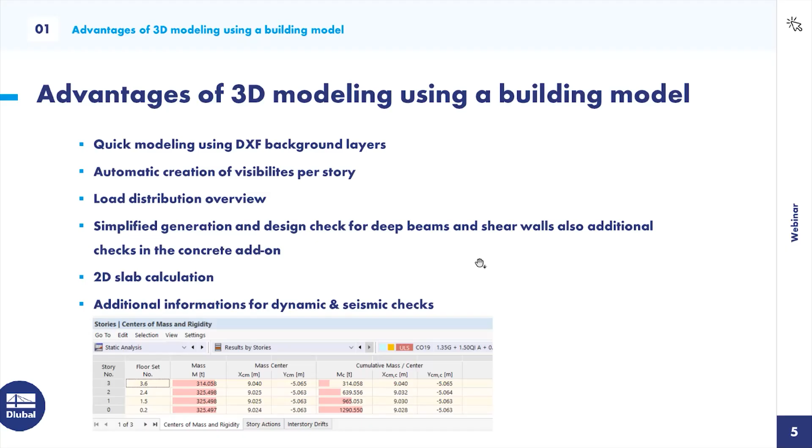Okay, let's switch to the next chapter. Here a little overview about a comparison with positional structural analysis.

The pros of the positional structural analysis are, of course, you can model this very fast and also do the design checks, and you only have two degrees of freedom in this 2D calculation. So you must consider so much less effects and so on. It's very simple, and you can check it very easily.

The cons are when you design a slab or a story, you calculate this, then you must make a load transfer from story to the walls, to the columns, and from there again to the slab. So you must all the time transfer new and new again until you are on the ground floor. And there you can make failure very easily when you forgot some loads.

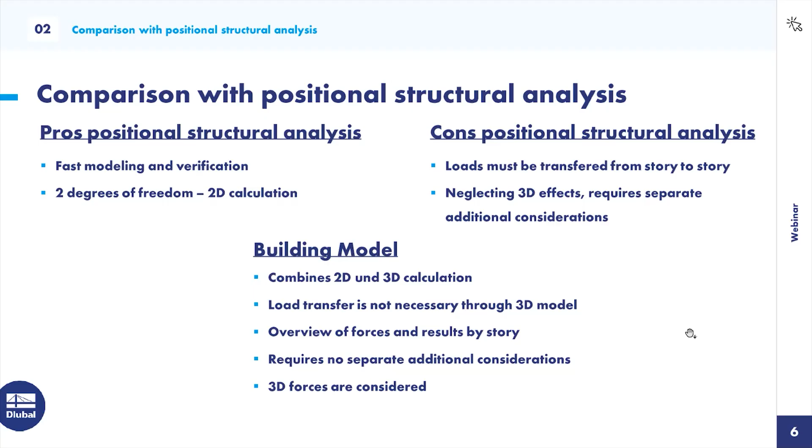Now about the impact of our construction stages analysis. It's more nice to know - I only want to show you the options you have with our add-on. Here you are able to consider construction stages. I will show you, for example, first the walls and the columns.

Then, let's say, after 30 days we make our slab from the ground floor. 30 days later, the first story, and again. So you have, in connection with the time-dependent analysis, the option to also consider the time, and that's very great because I'm of the concrete team.

That's important - what I think about first, the material parameters, for example for the creep and shrinkage. So you see, after 30 days it's a completely different creep coefficient in comparison to 120 or 150 days. So you will have influence only from these material parameters, and we can consider this when we use the construction stages and the time-dependent analysis.

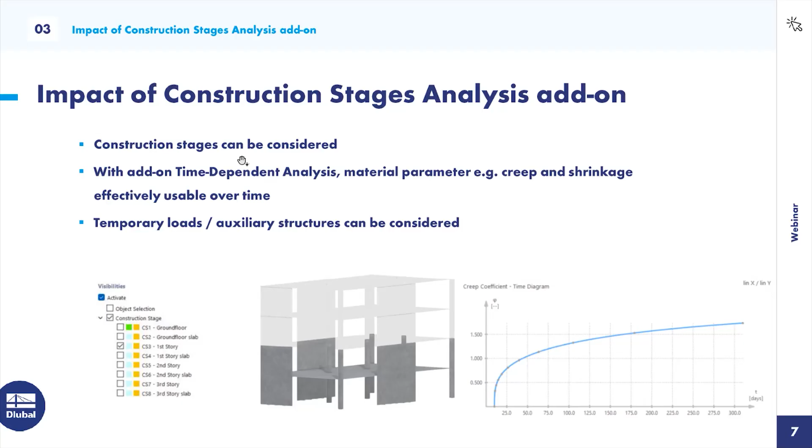Okay, that should be my overview of what I wanted to show you today. Now let's switch to RFEM 6.

Therefore, I will create a new model and call it building model, 3D type of model, of course. Here are the add-ons we need. At the end, I will show you the construction stage analysis and the time-dependent analysis.

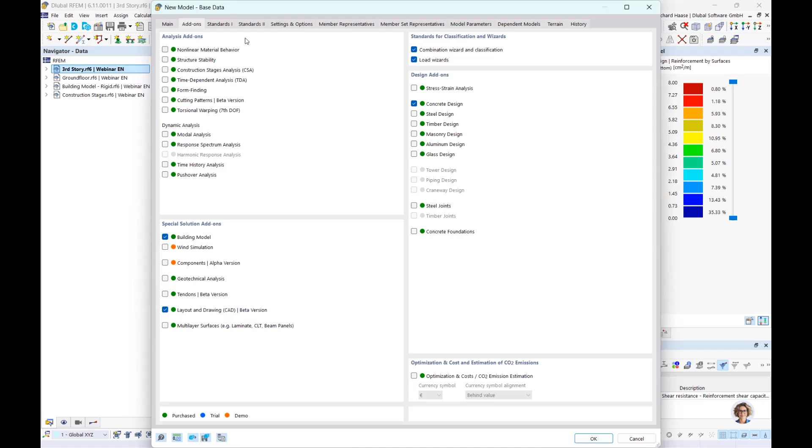But for the first step, I only activate the building model add-on and our concrete design. Here in the standards, I choose today a German example, so let's choose national annexes here.

We also have load wizards for wind and snow, and there's a nice connection with the model parameters. We have our Geo-Zone tool where you can see the forces from seismic, snow, or wind, and there's a direct connection in RFEM6 when you click this button, which opens our Geo-Zone tool in the background showing information about snow, wind, and seismic.

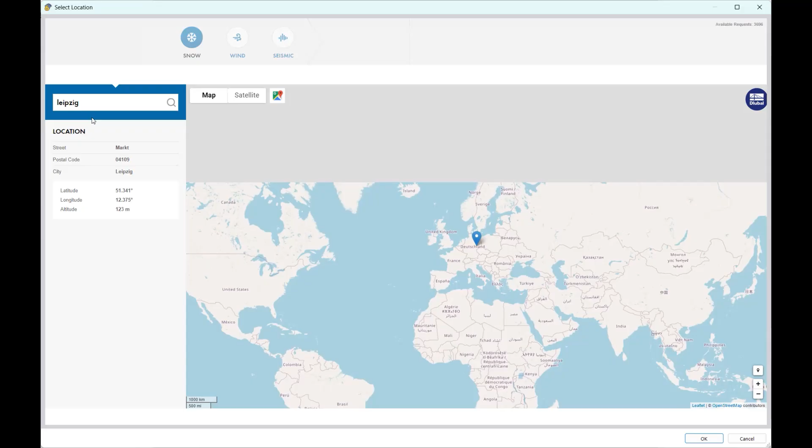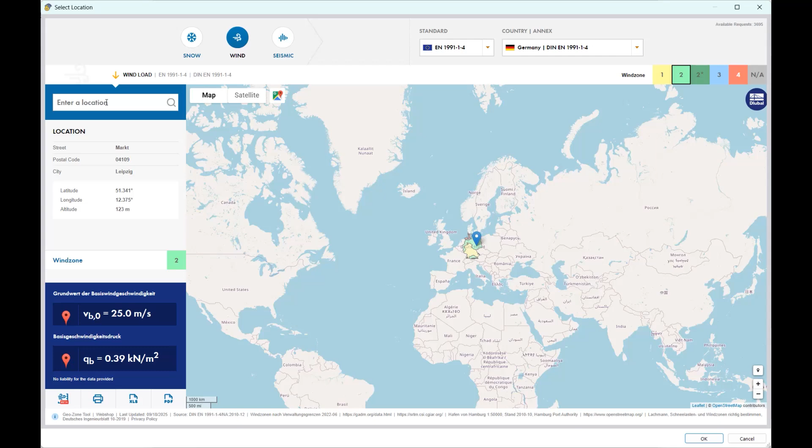Let's take our Dlubal office in Leipzig and say OK. Here we see the characteristic values of the snow and wind loads. When we click OK, RFEM6 imports this information from the Geo-Zone tool. Now RFEM has the information, and when we go to the load wizards later, RFEM already has the data, so you don't need to choose the category, wind zones, and so on. I'll show you that later.

Okay, then let's go to the materials. I have chosen concrete C30 and reinforced steel B500.

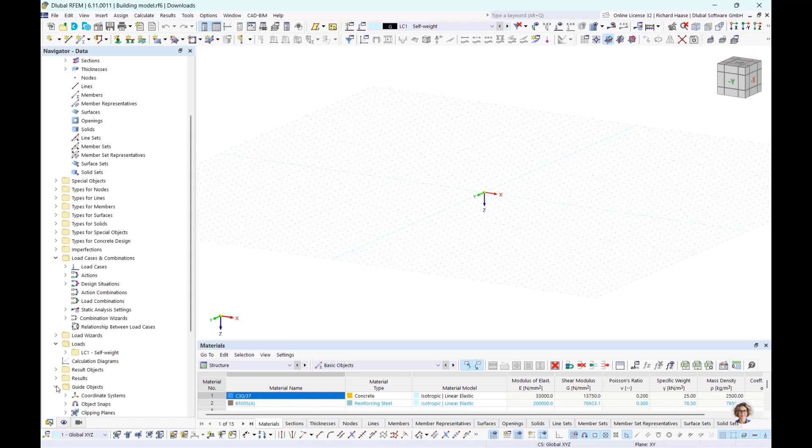Now I want to show you the quick modeling. For this, we need our background layer under the guide objects. Okay, here we have our background layer.

First, let's switch to the building model, where we can create our building stories. Let's say we want a 3-meter height and 3 stories above the ground floor, and choose our floor type as rigid.

When we choose semi-rigid or rigid floor diaphragms, we have the option to select the supporting type for all nodal and line supports, similar to what you'd design in a 2D calculation. Let's say we want hinge-to-hinge for the upper floors, and in the ground floor we have a rigid hinge on both sides.

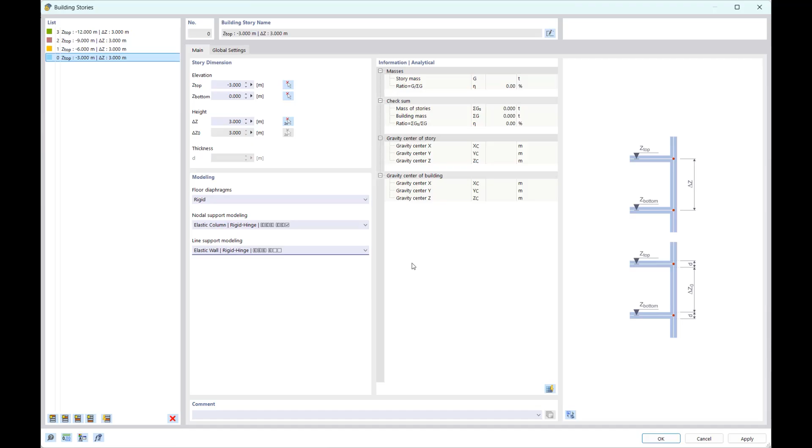Okay, then we have created our stories. Now let's begin with the modeling.

First, maybe we delete this and say okay, I need a new section. We see here we have circular columns, so I choose this column. Let's say 200 millimeters is the default setting.

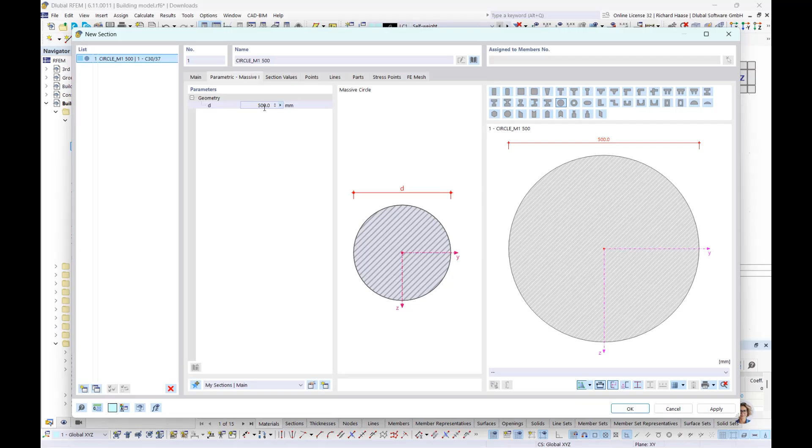Now we want to measure the information directly from the DXF background layer, so from here to here, and it switches to 500 millimeter diameter. Okay, then we also have our walls.

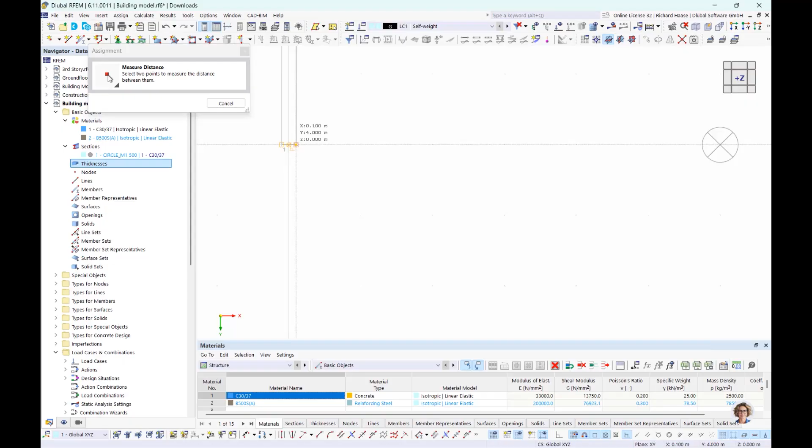For the walls, we do the same: a new thickness, and what I only changed is to show that it works, 300 millimeters. Let's make that the default setting, and measure the information from the DXF file - we get 200 millimeters for our walls, and we need a new thickness. For the slabs, it's 24 centimeters. Of course, you can directly read this information from the 2D background layer, so I take this measurement and it's fine.

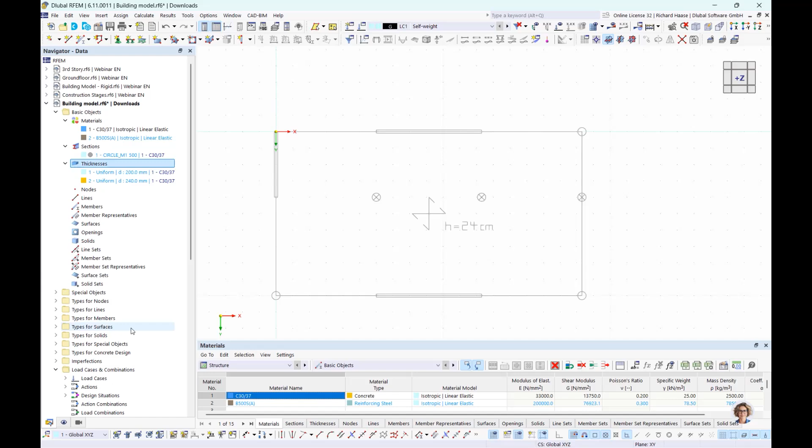Okay, then we have created our sections and thicknesses, and now I want to change the rendering for the input. For that, you go to Model, Solid Model, Surfaces, and here we have the option 'filled inclusive thickness'. This is very good for control - you'll see what I mean in a few seconds, but let's first start with the columns.

This button is really specific to the building model add-on, and it gives you the option to model via the bird's eye view. So let's start with our columns.

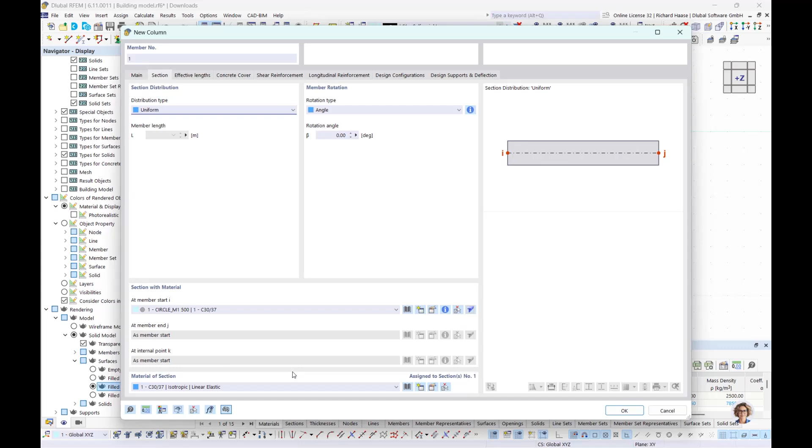We choose our measured section, and here we can select the building stories - let's say we have this column in all building stories. Apply - oh, I made a mistake, sorry, I clicked too fast. Okay, so we have these columns, and when you go here, you see directly this big bubble.

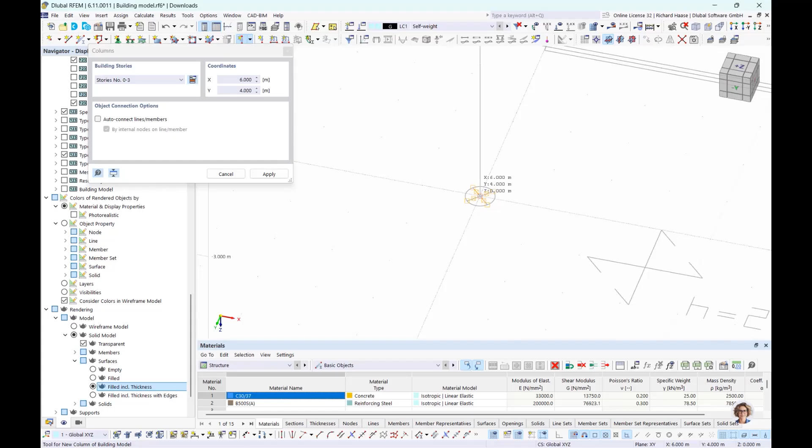It's the sum of the masses per story. When we click here for another point for the columns, you see it's growing and moving more toward the middle. Let's do this for the others too, and our columns are ready.

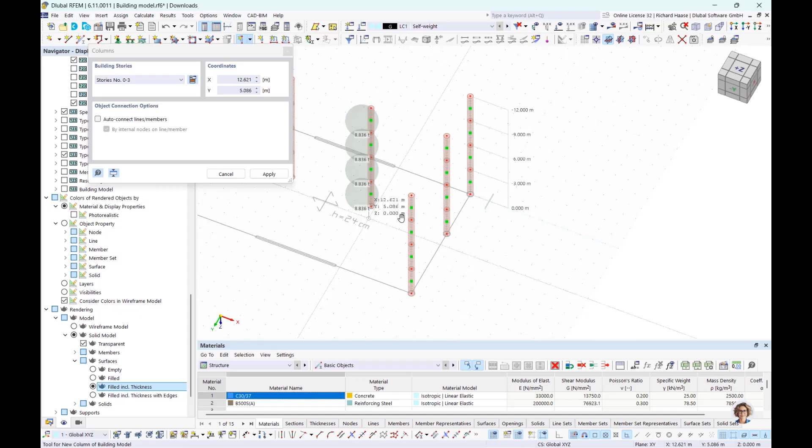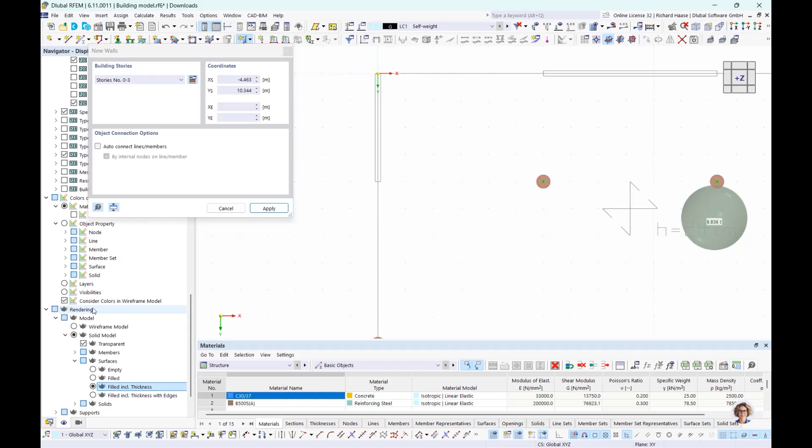Now the same process for our walls, our 20 centimeter wall. Maybe we switch back to the bird's eye view. Now you see here our rendering option - there you have a direct control option to check if the thickness fits the background layer, and you see, okay, it fits.

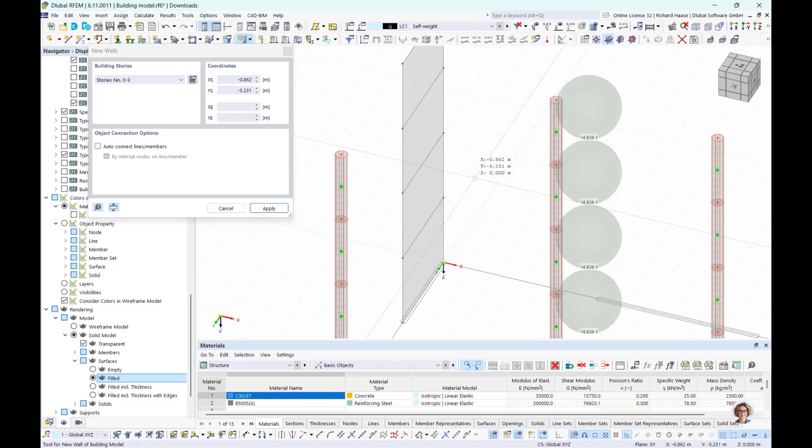The default setting is only filled, giving you a 2D visualization, but here we have the real thickness, and I prefer this for controlling. Let's continue with the other walls, and our last walls here.

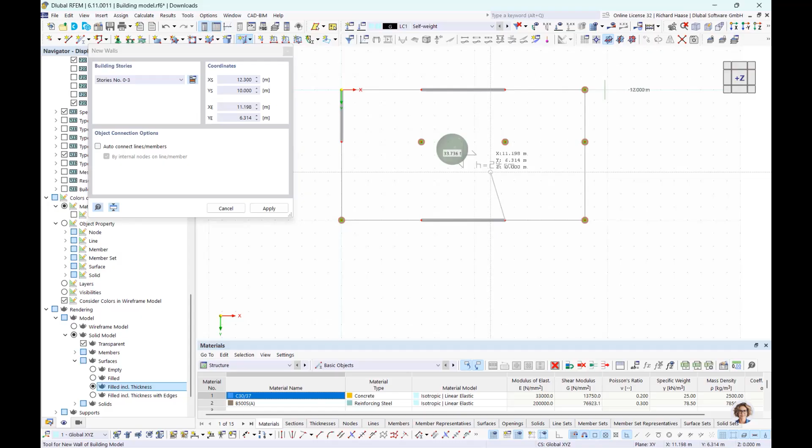Okay, one thing is missing - the slabs. Let's choose the rectangular floor here. For this, we need the other thickness, 24 centimeters, and of course all stories are activated.

Good, now we see here these red lines. It's the special thing of our slab type rigid, because for this rigid slabs, there is a moment.

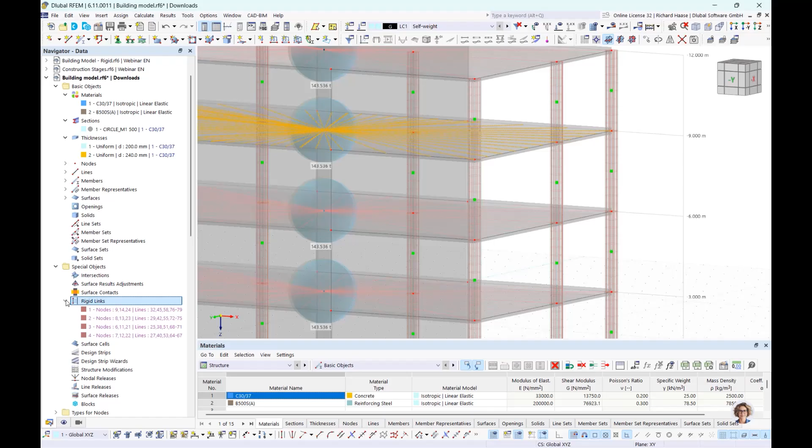We have here also special objects, rigid links, and this rigid links connected the edges of every slab to the center of mass per story.

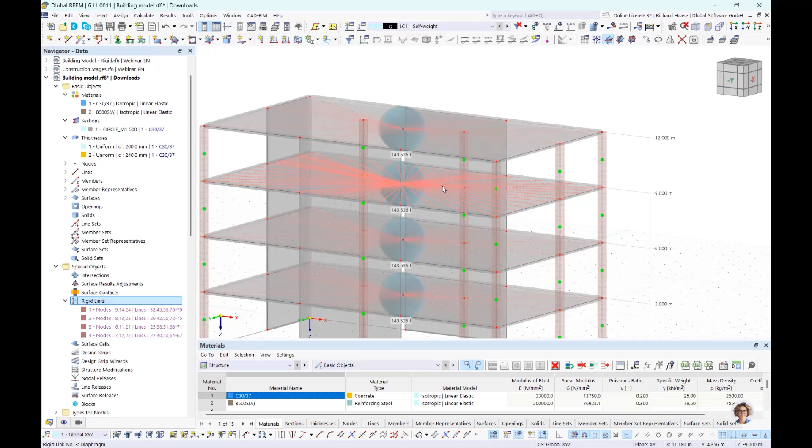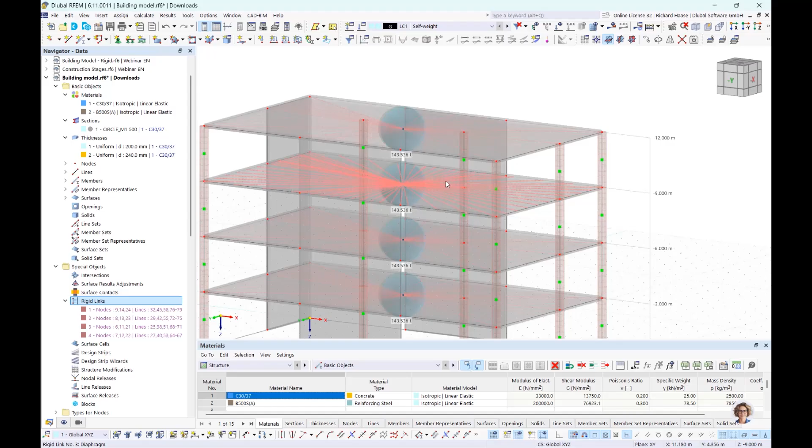So this is a good point for dynamic analysis, because it simplifies the masses to one point, and it's then more clear for dynamic and seismic analysis. This also reduces the calculation time and the eigenvalues. This is a really nice feature for dynamic analysis.

Okay, so we also can deactivate it here. One moment, it's the special objects. Okay.

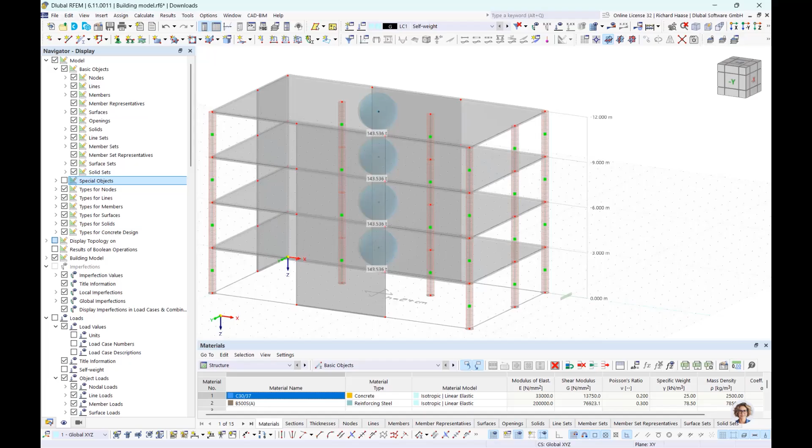And now let's continue with the supports. Let's say we have here our fixed nodal supports. And also the line supports, let's say it's also rigid. Choose here, here, and here.

Okay, then let's go to the loads. Therefore, we must create some load cases. Let's say here self weight, or dead loads, and here we need some live loads. The snow and wind load cases I will show you through the load wizards.

So let's say firstly okay here, and go now to the load cases and create some surface loads. Really simplified, but it should fit. Okay, let's say we have here 2 kilonewton per square meter, and we can say apply and next.

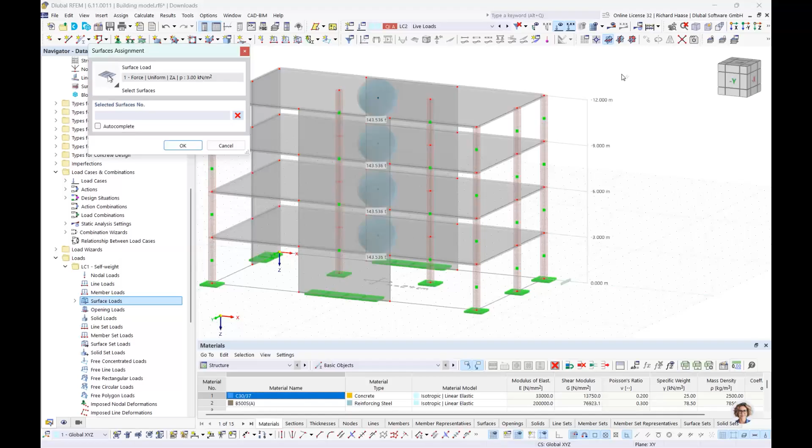So, switch to our live load case, and here we want to have 3 kilonewton per square meter. Okay, and let's finish this. So we also have the option to control this very fast, but it looks good.

So then let's switch to the load wizards. We have here the option to activate such load wizard, relatively new, let's say we have also load wizards for the moving loads.

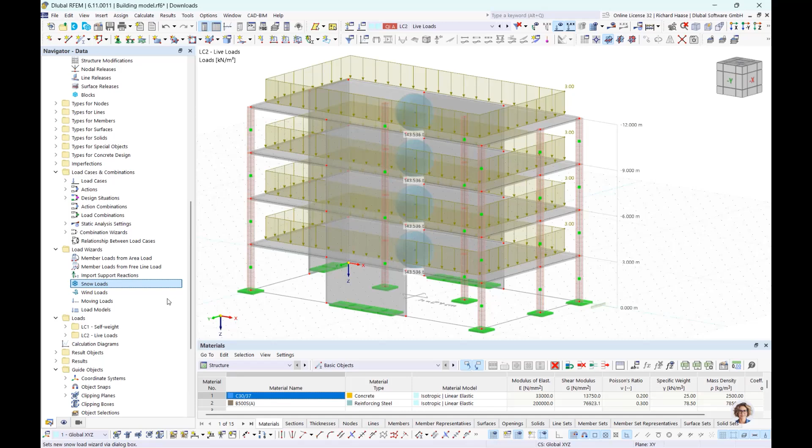Okay, but let's go to the snow loads first. We want to create a new load wizard for snow. Must here first pick the roof corner nodes, and let's see, here, and here, and yeah, we have a flat roof type.

Go now to the parameters, and now we see what we do in the beginning. The definition type is changed to map and parameters, to this German location, and you see here it's automatic, which load zone with height, which height, and the characteristic snow loads and other coefficients. So this is simplified, and it's easy to switch here.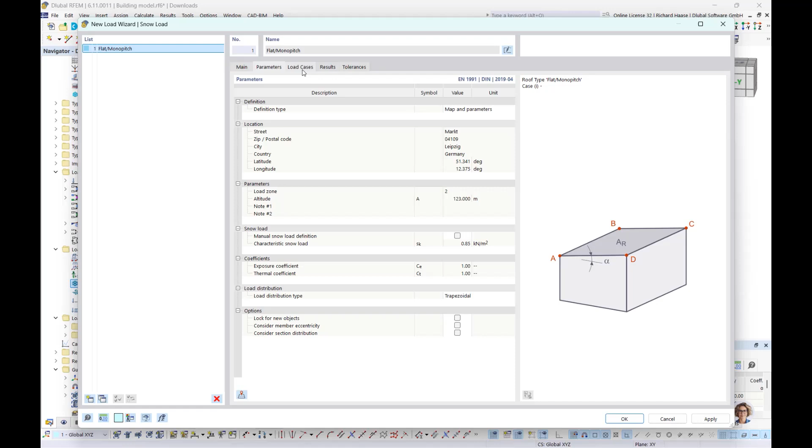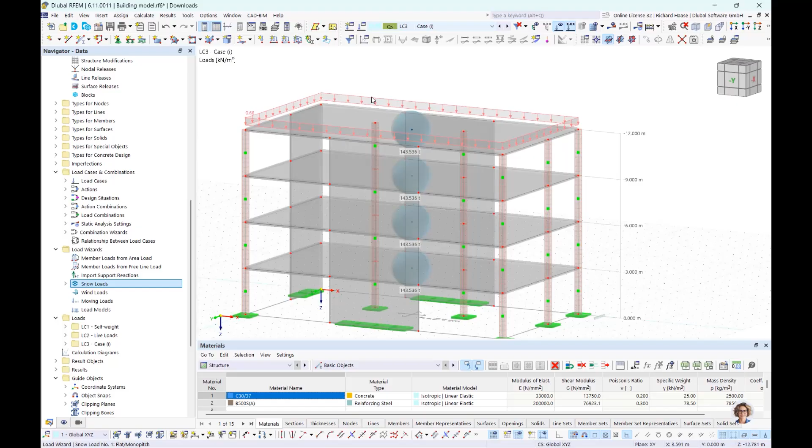Okay, then to the load cases. So you see here, I would create a snow case here for you, and you only must click this button, generate load case, and say okay. Very fast, we have now our load case here with our snow loads, and the same works for the wind loads.

Here we must, okay, that's the base corner. And here. Okay, the same for the roof corners, for the wind.

Okay, so then you see on this picture, we have here our 4 wind directions, and let's say we limited this to wall 1 and 4. And okay, the parameters here is the same. You see our location, the terrain category, altitudes and heights, and load zone.

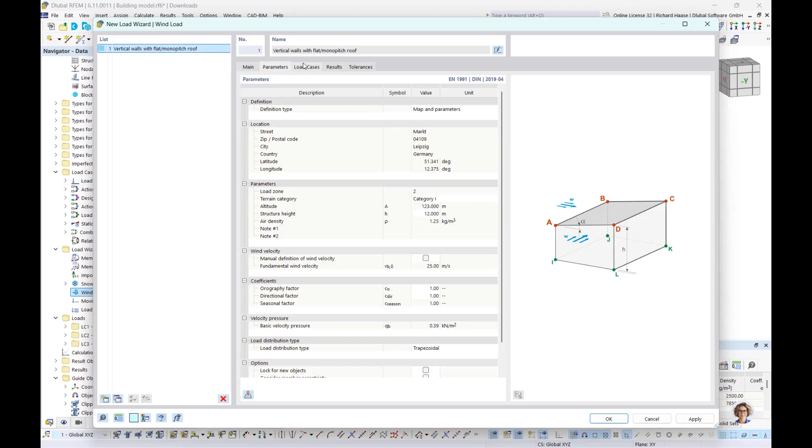It's automatically transferred from our map. And yeah, so we have here again this option to generate automatically our load cases. And we have here 2 load cases per direction, and say okay, and we can prove it, of course.

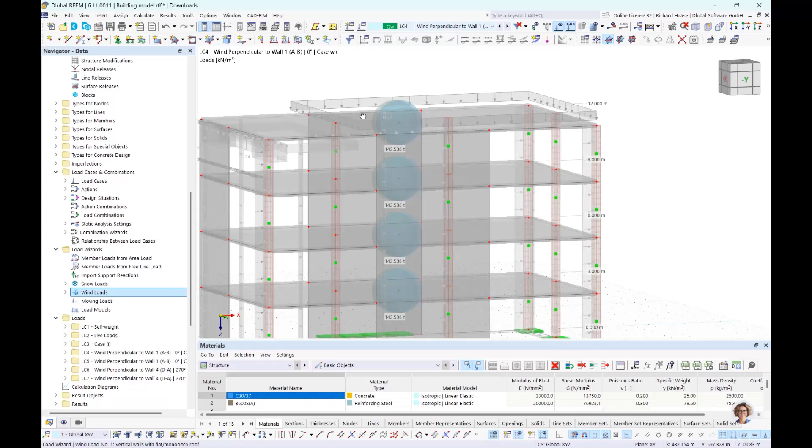So we see here our wind loads, here special this load area for the slab, and the same works here for the other wind case.

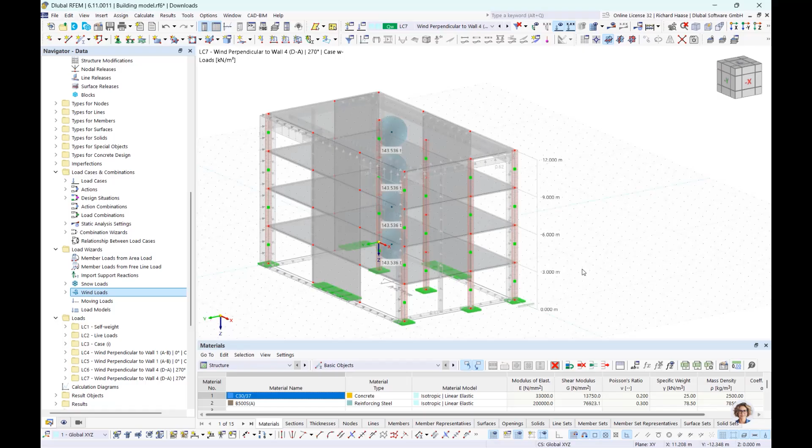Okay, so our loads are finished, and I don't want to waste time with calculation, and would switch now to a calculated model, our building model.

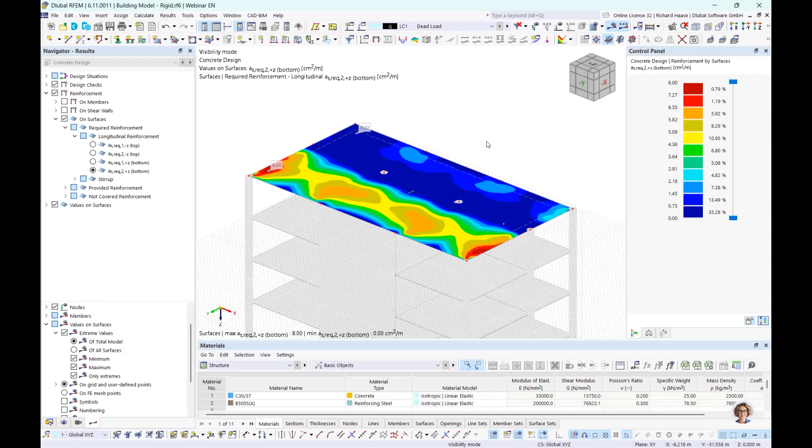Here we have results, and let's go to the dead loads and switch to the static analysis. So, oh, I don't have calculated. Okay.

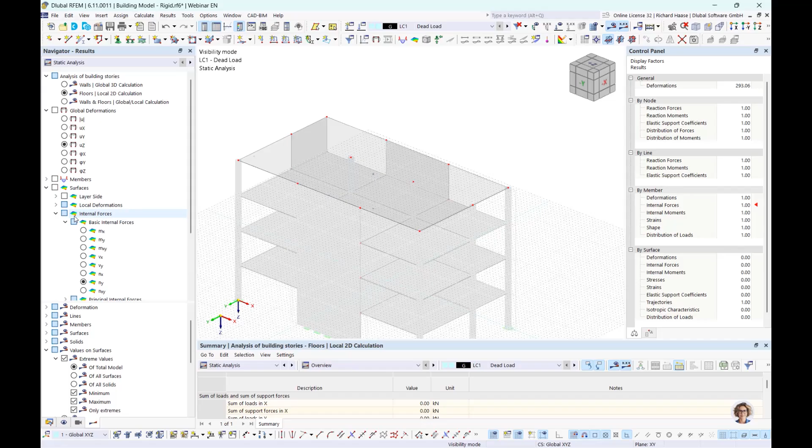Yeah, and here we see the first thing which is activated when you have chosen the rigid or the semi-rigid floor type, that it is calculated 3 times, and that's because we have now here an additional option in the static analysis of building stories. So you can have a look only on the floors, on slabs, and I want to show the internal forces, the moments.

Switch back to all, and now you see here really only the results per story per slab. When we switch to the 3D walls calculation, we have additional walls, and because these walls are connected via the slabs, internal forces can also be in the slabs. This last option, walls and floors, is a sum of these two.

And here we have our combined results. But what I want to show you before is our load distribution for the case of the dead load. Oh, and I forgot here our visibilities, which are automatically generated.

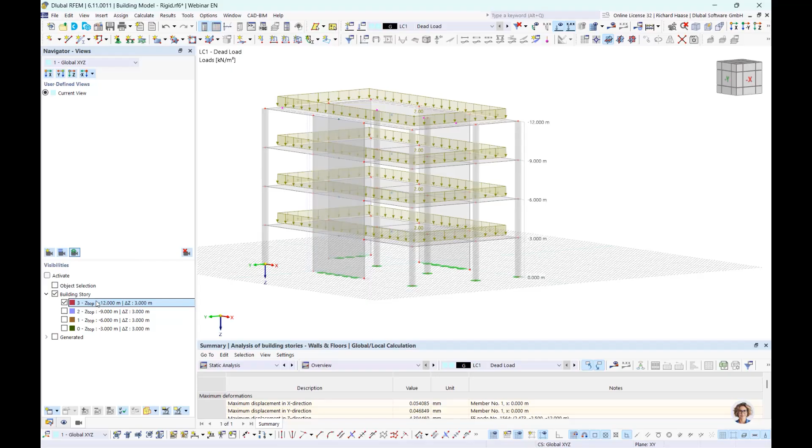Now we have the option, or in the normal case you must define this by yourself, but the building model add-on creates it automatically per story, so you can easily switch and have every story a fast generated view for that.

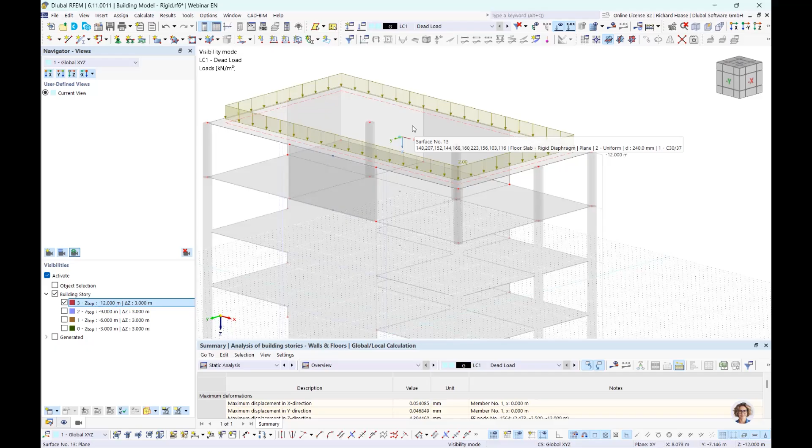Let's go to the third floor, and here we have our surface load, and now we have the option to see how the load distribution works. We right click on the surface and use this button, loads from load distribution surface, and now you see how the surface load is distributed to the walls and the columns.

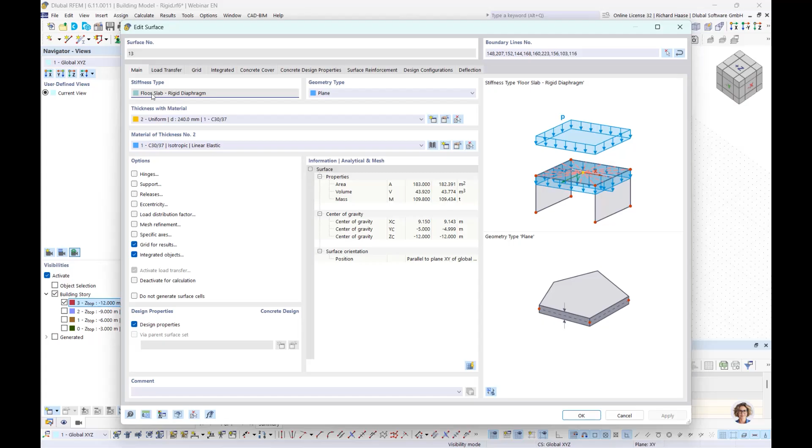When you double click on the slab, you see here our stiffness type, floor slab rigid, and we also have a load transfer menu. Default setting is the FEA type, but you can also say it should only distribute in the local axis X or Y stripes, or X and Y stripes, if you want to do it that way.

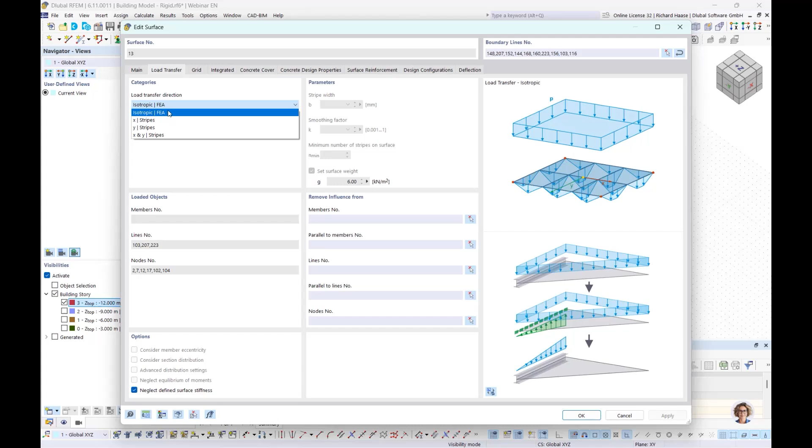Okay, but let's switch back. Another thing I mentioned in my presentation before is that in the building model we have the building stories, and now we also have the option to define shear walls and deep beams. For the shear walls, I do it here before. So when we click here, we have this one wall, and it is easy to define.

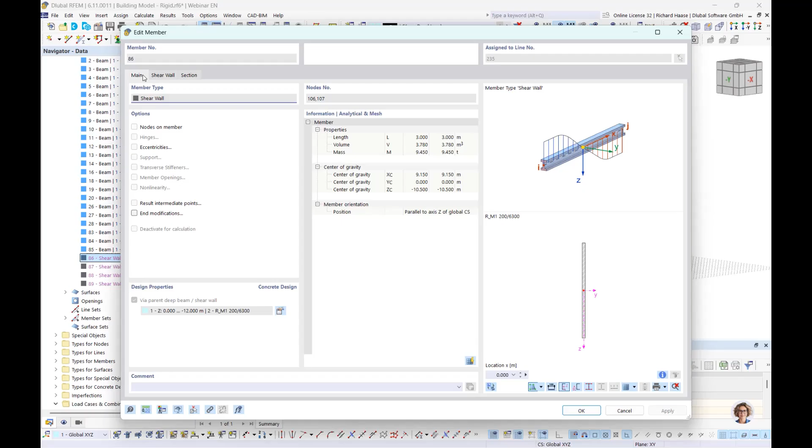You only must select surfaces or surface cells, or even a member is also possible. In the background we can see our columns, and this purple color shows the shear walls that are generated in the background. You can see it's a result beam, which integrates automatically the surfaces, surface cells, or members chosen before.

And finally here our member sets. So you see, you can also do this manually, but the building model add-on simplifies the steps.

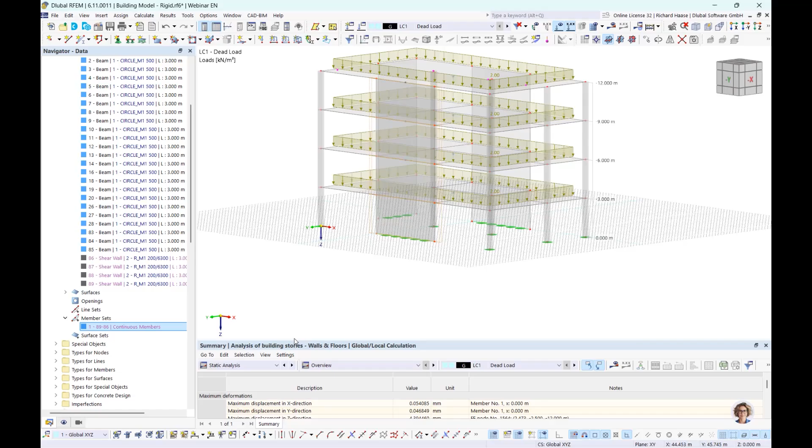Another good point is when we switch to the static analysis, we have a new chapter, results by stories, and can really see which results come from which story. Here story actions, horizontal forces for example, or interstory drift or deformation.

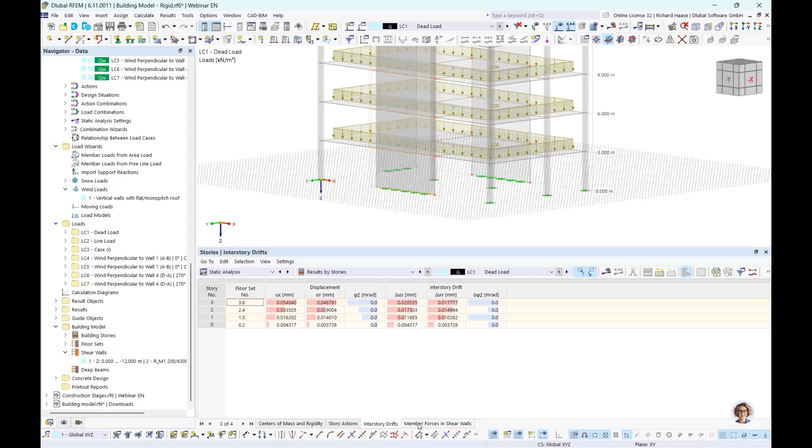And because we defined our shear wall here, we also have a new chapter, member forces in shear walls, where you see the axial forces, shear forces, and moments separated for every story. That's a feature which only the building model add-on can provide. Of course, you could create it via a result beam, but these results by stories you wouldn't have without the building model add-on.

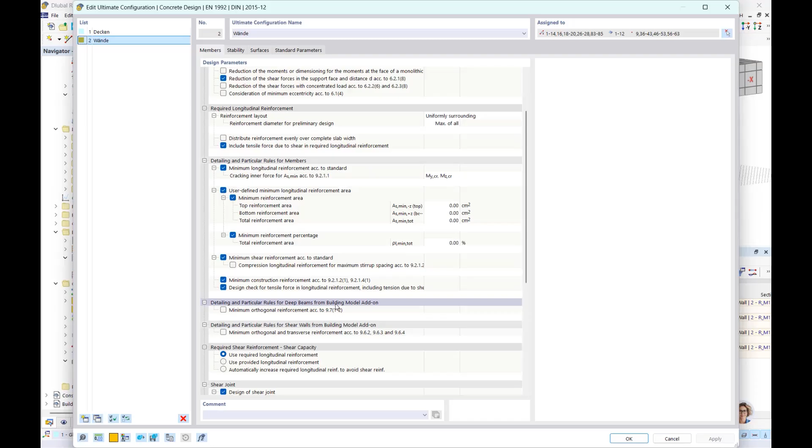Okay, then let's switch also to the concrete design configurations. Because these walls and deep beam shear walls and deep beams are result beams, under the concrete configurations we have a chapter for members with special additional checks, which are only possible when you use the building model add-on.

And also, for a better overview in the concrete design, when we check here, we have additional design ratios or reinforcement calculations for shear walls and deep beams. Without the building model, all these ratios would be found on the members, so now you have an extra chapter for that. It simplifies the work and gives a better overview of the results.

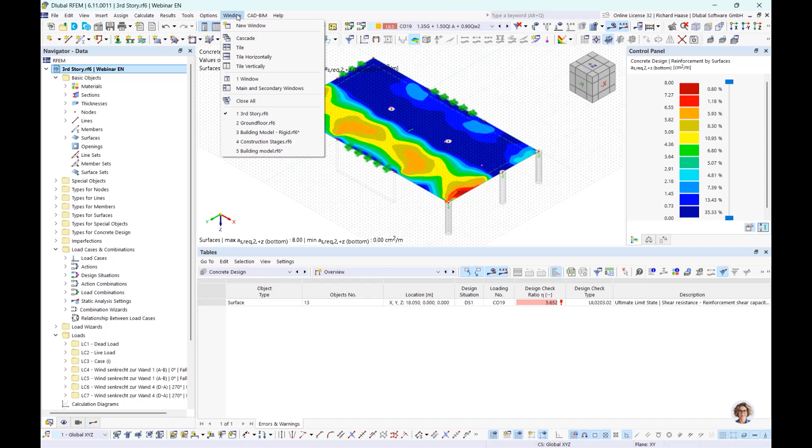Okay, then let's compare this to the traditional way of analyzing slabs. We want to have a look at the third story, and I will show you that we get really the exact same results. Therefore I want to create the windows next to each other, and when that's not... okay, now we have selected both. I want to show you again the window.

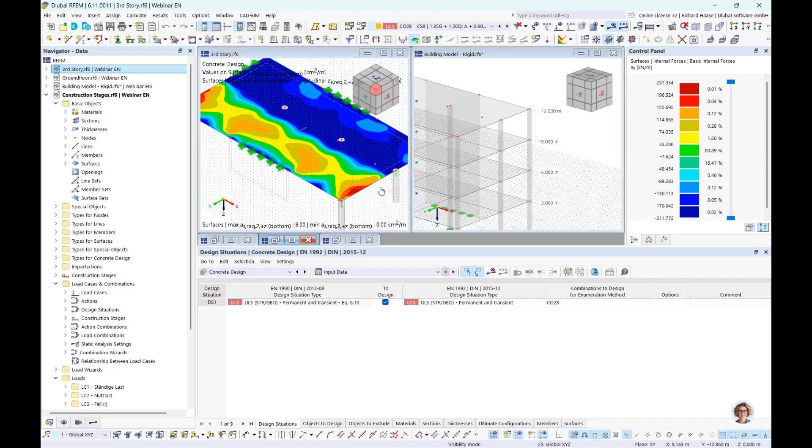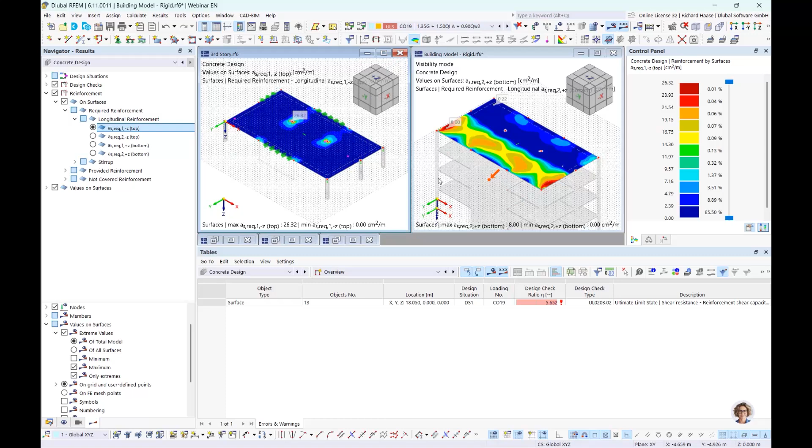Go here, select only the third floor. Okay, now you see the 2D model, choosing also here type of model, 2D plate, and let's compare here the required reinforcement. With our building model, you see we have exactly the same results.

Let's do it again, and the last one. So you see it's with the building model, it's possible to have a traditional structure analysis calculation of 2D, but integrated in a 3D model. And yeah, you get the same results here. That was what I want to show you.

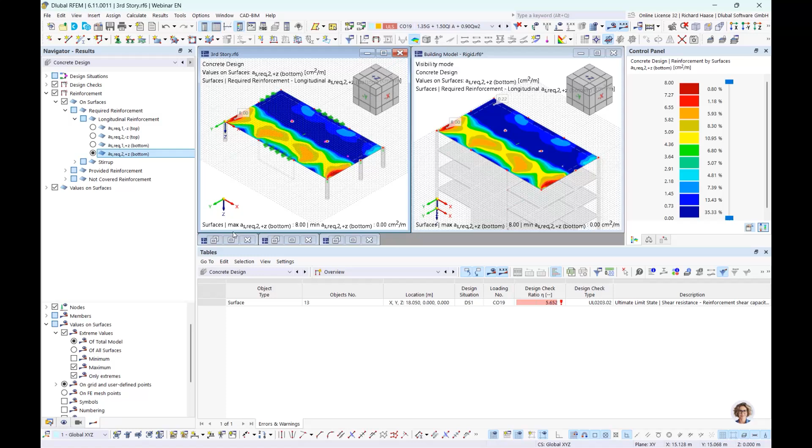So okay, maybe we go, I hope this was the right model, to the ground floor. Because I also want to show you the option with the load transfer, and show you that it works the same way with the 3D model.

So I have created every story, an extra model for every story. And here my last step was to load transfer from the first story the forces to my ground floor slab. And here you see this connected model. The thing is, it works: you must create in our Dlubal Center connection that all models are in the same folder, and then you have the option to connect these models.

And when we switch to the object chapter, you're also free to use it manually. There you can say, okay, for example, I only want to transfer from only single nodal supports or single line supports to this and this node or line. Or the faster way would be free loads, created from the support reactions, as free loads on our actual model.

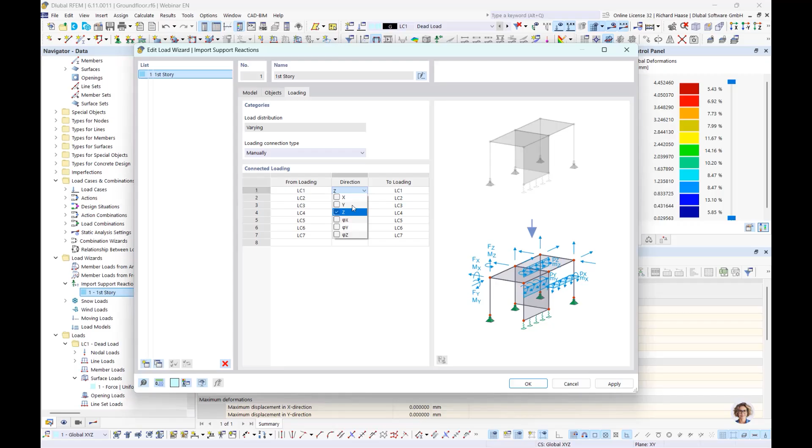Then for the loading, you also have the option to say, okay, I want to choose it manually. So you can transfer from load cases or also from load combinations to our actual load case or load combination, and can choose here also the type of forces which should be transferred. So I only choose here the Z direction.

And yeah, only for comparison of the dead load, you see here again in this purple color the loads which come from the first floor slab, and can control it here also the forces, and yeah, these models are also connected.

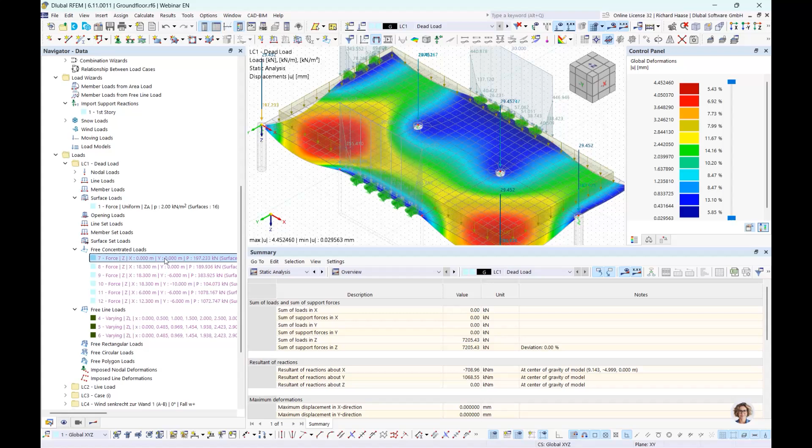For example, when I change something in the second floor, these load transfers are connected with each other because they are in this Dlubal Center folders, and then there's an automatic recognition that this change also results elsewhere. And if you don't want this, you can also say, okay, that's finally good enough - you can separate the connection, and then it's fixed.

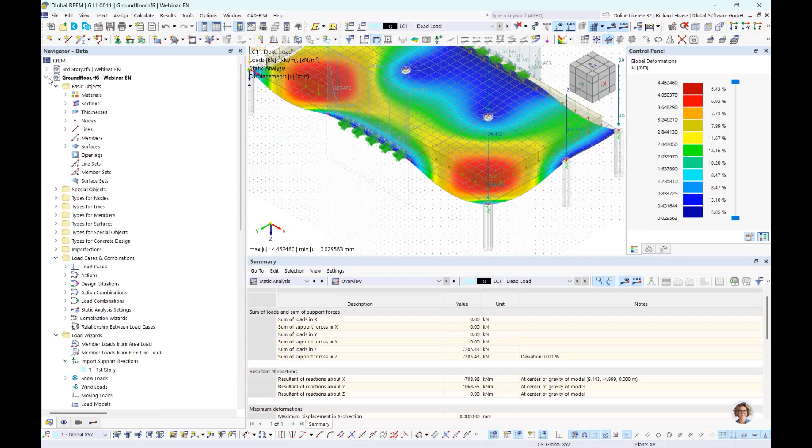But the thing I want to show you is the sum of loads, and we have here our 7.2 meganewton, and when we switch back to the building model, so 7.2, dead load result by stories. We have also here 720 in ton.

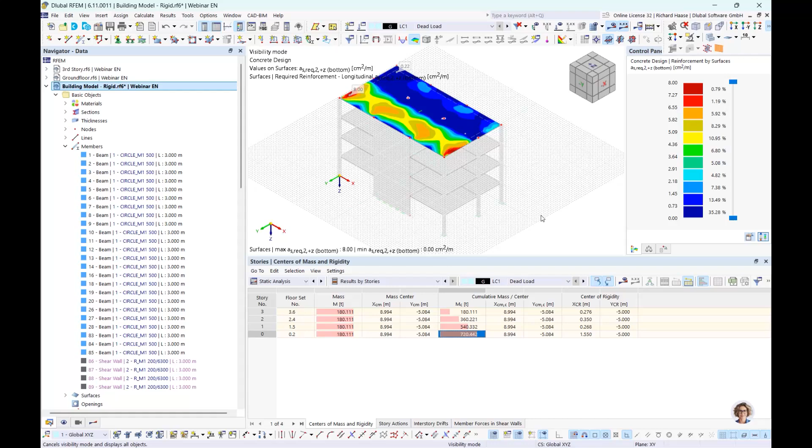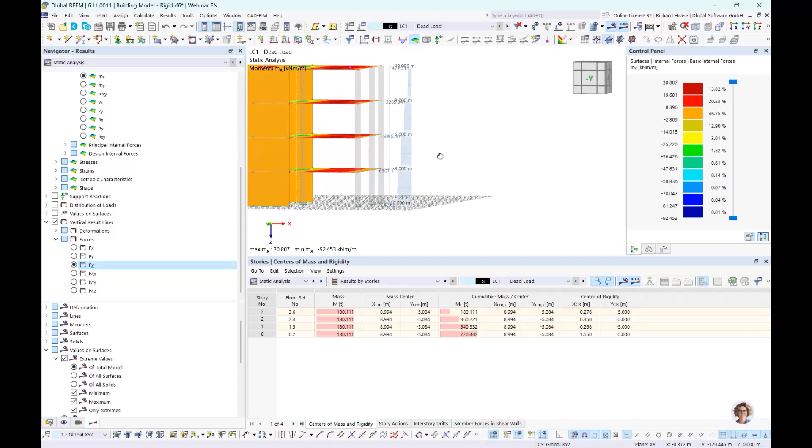But we also can do this when we cancel this over the static analysis. Here we have vertical result lines, also a feature only from the building model. You can say forces and FZ, and you see also here the forces per story, and finally also here our 7.2 meganewton. So the masses are identical when I choose it in 2D and 3D.

Okay, then let's maybe deactivate it again to the story actions. So I mentioned also that it has pros when you use dynamic analysis or seismic analysis. So you have here, okay, for dead load it's a little small, but...

The forces in global X and Y, and these forces you can compare, for example, for the seismic forces, and can think about it if the seismic forces are governing. And also with the interstory drifts you can do serviceability checks and say, okay, this deformation per story is too high, or it's okay.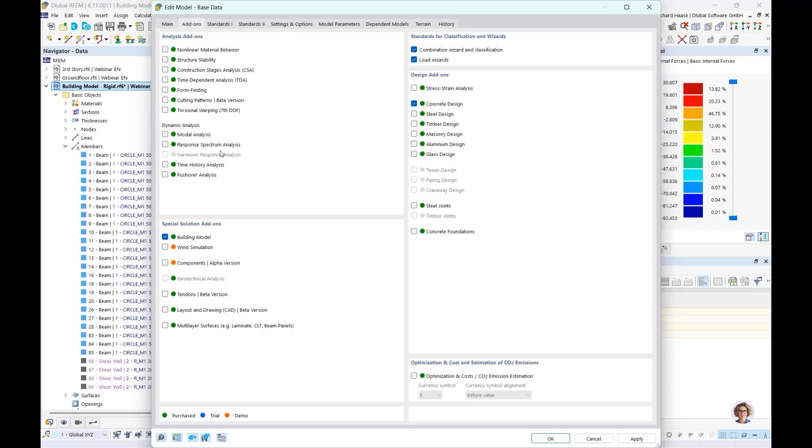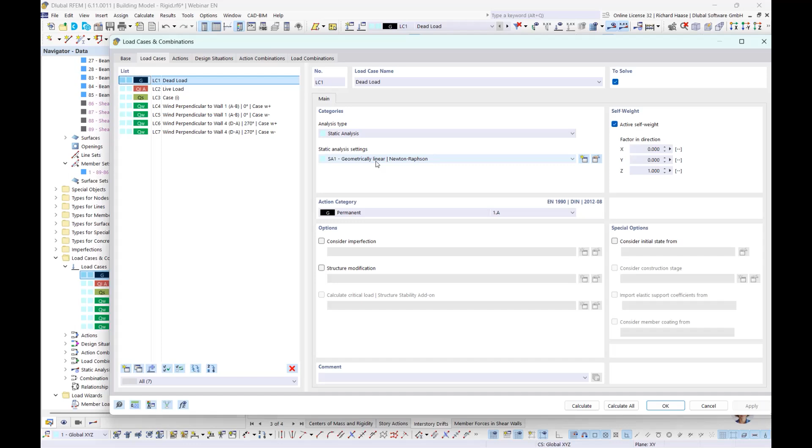And also, but I don't want to blow up here this model - I only want to say to you, when you would have activated this response spectrum analysis, you would also have this result by stories chapter for the response spectrum, and there is also a value which shows you, okay, is it allowed to calculate to theory of first order, or you must switch to second order. So first order is geometrically linear, or the second order theory.

Okay, and about the rigid links, I told you before that they have a good effect for the seismic.

Okay, we also have two additional story types I want to say something about. Here are rigid and semi-rigid. Then we have also without stiffness, which is really only a slab without stiffness, only for load transfer, and in some cases this could be usable.

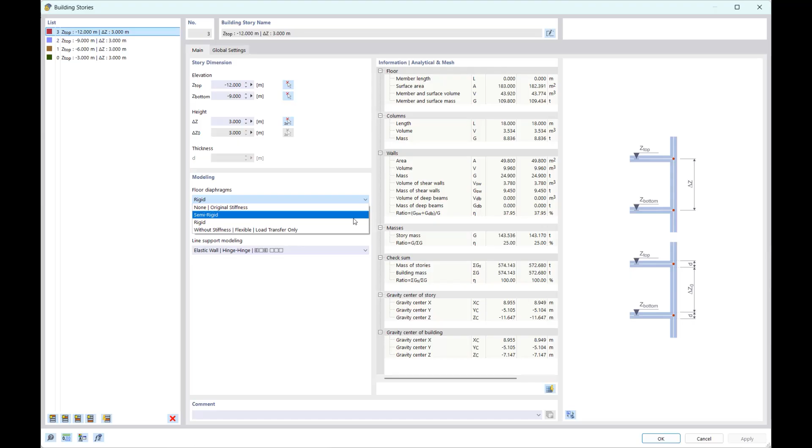We also have this None | Original Stiffness option, and when I choose this, I don't have these 2D and 3D calculation types. This is like modeling a normal 3D model, so I must create the hinges and conditions manually. But what I get when I choose this is also additional information and result types, result by stories, which is usable for every type.

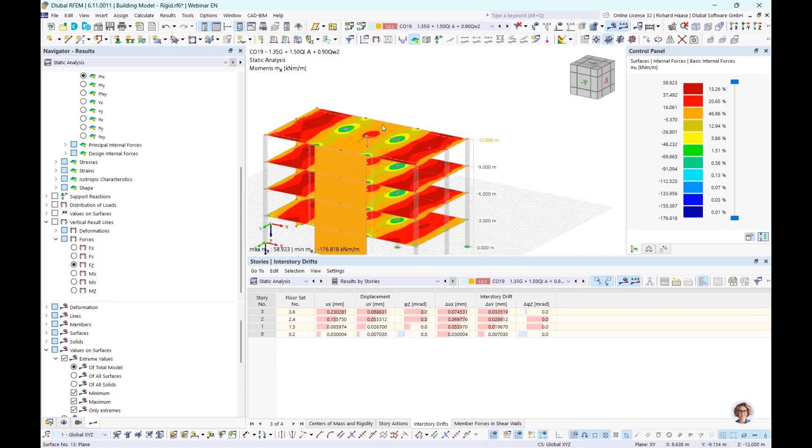So then let's have a look at one combination. I choose the 19 and compare here something. Let's go first to the third story. And of course, when I have a 2D model, we don't have axial forces in the slab, because we have this 2D model.

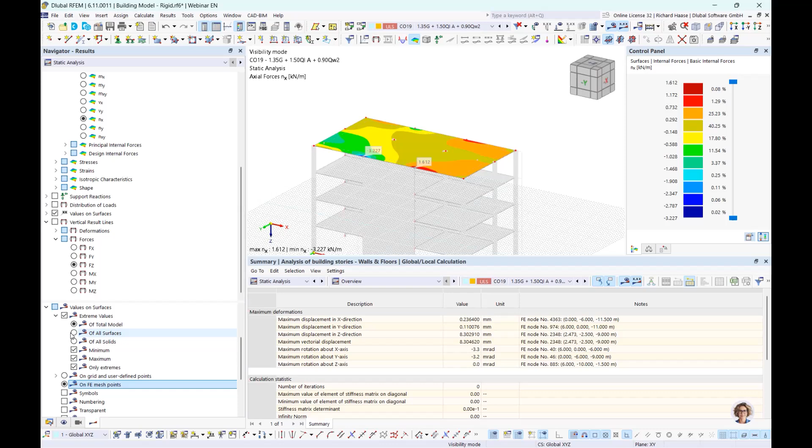And when we switch now to the building model 19, we see values on surfaces, and we want to see all about extreme values. We see, okay, we have nearly zero normal forces, so it's very close to the 2D calculation.

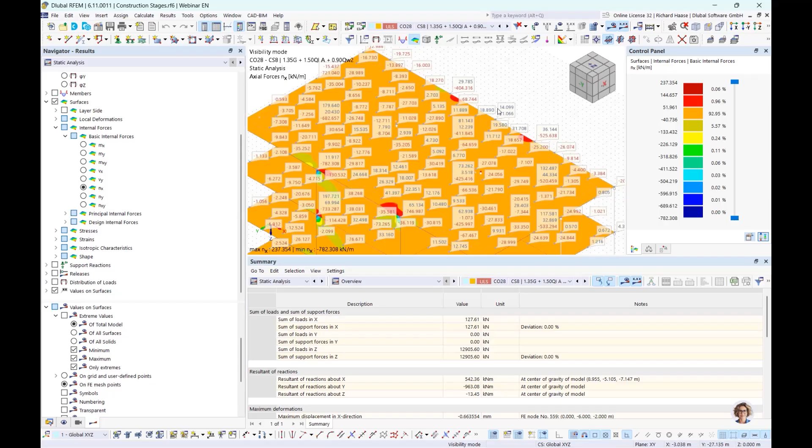And now I want to open a model with the construction stages. So what I showed you at the beginning, when I really consider the stages, and we go to this third slab, you see, okay, we also have here some axial forces in the slab. So this could have influence on the results. Just so you know why there is a difference between this 2D and 3D - yeah, it could be because of these axial forces in the slab.

Okay, but that should be with the building model. Now I'm in my construction stages model, and then I want to show you some things about it.

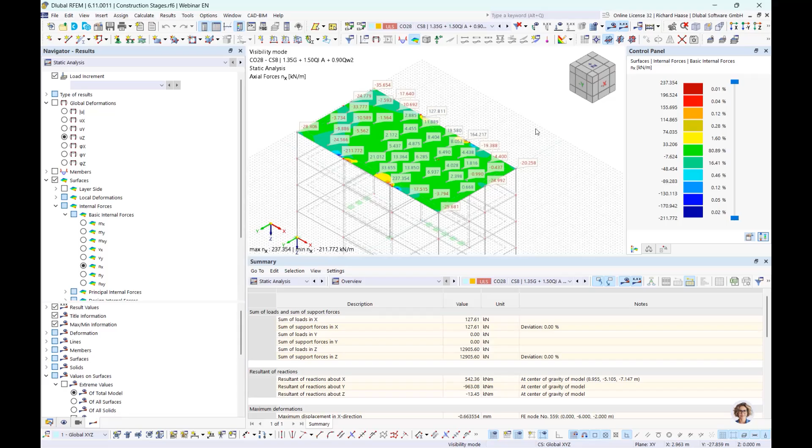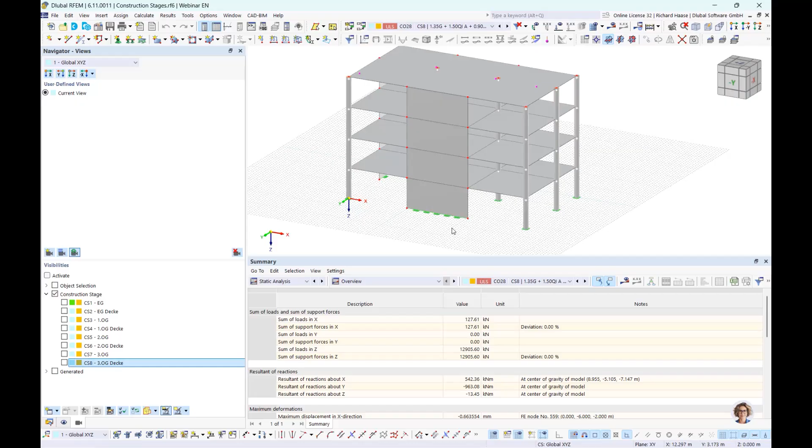Maybe we go in this - with the construction stage, we also have an automatic visibility, and can see which construction stages I define here. I forget to rename it, so it's the ground floor. Then in the second step, the slab is added. Then the next floor, and so on.

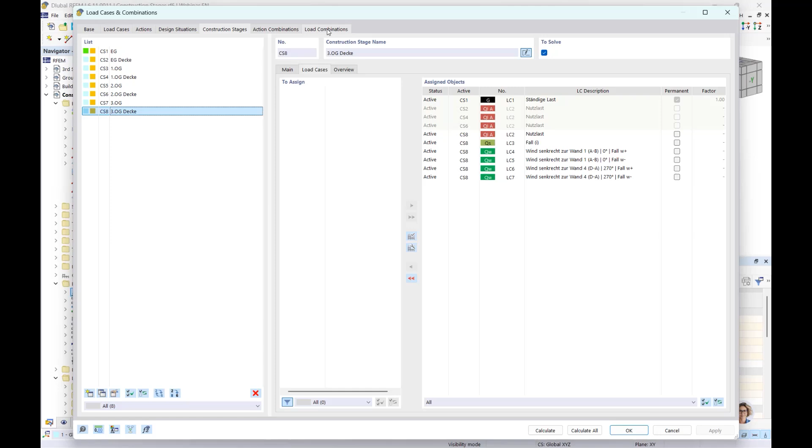And these construction stages we also consider for the load cases. So I have an additional construction stage menu, where we can say at first we only have permanent loads, and I can switch the load cases for every construction stage, or even delete them. For example, I say our snow and wind should really only be there in the last construction stage.

And these construction stages are also considered in the generating of the load combinations. So you see here these CS2 are the construction stages, and so you have calculations for every construction stage. Yeah, it's the most realistic calculation which is possible, I would say.

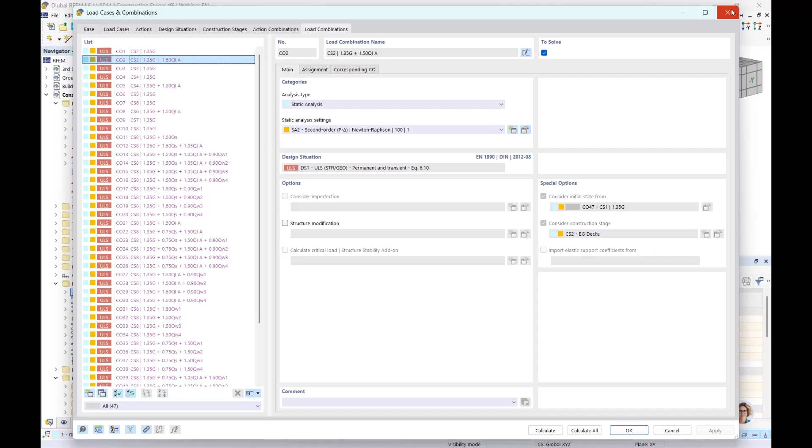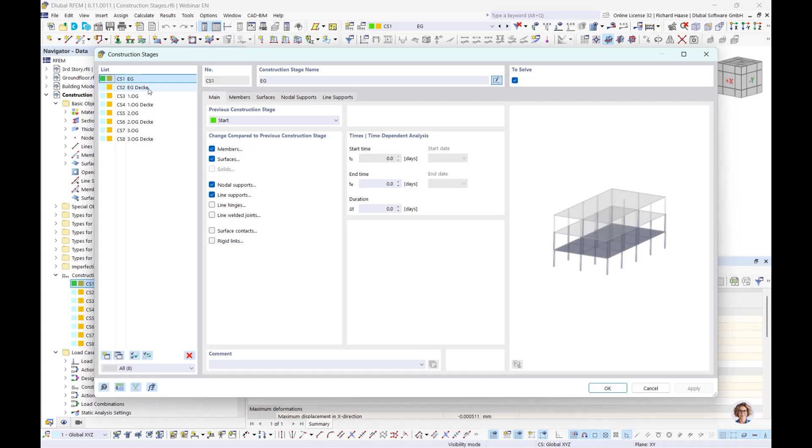Also I want to tell you about the time-dependent analysis and the creep and shrinkage effects. So therefore you must activate this time-dependent analysis, and in the construction stages we can then define the duration, start and end time again for every construction stage. And so this material parameter here, for example for the concrete, can be considered over time. I find it's a very nice feature.

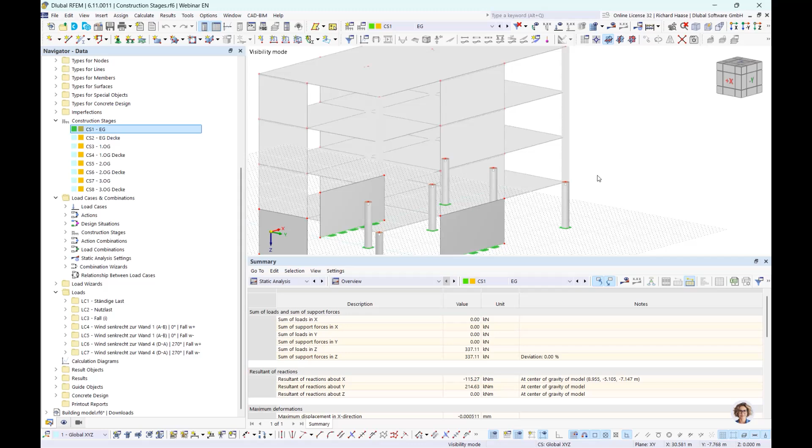Okay, that should be it for my webinar. I hope I could give you some new information. And if you have questions, please write us an email, and we will answer them. I hope you enjoyed this webinar, and want to say thank you from my side. See you - and so I would give back to my colleague Andreas.